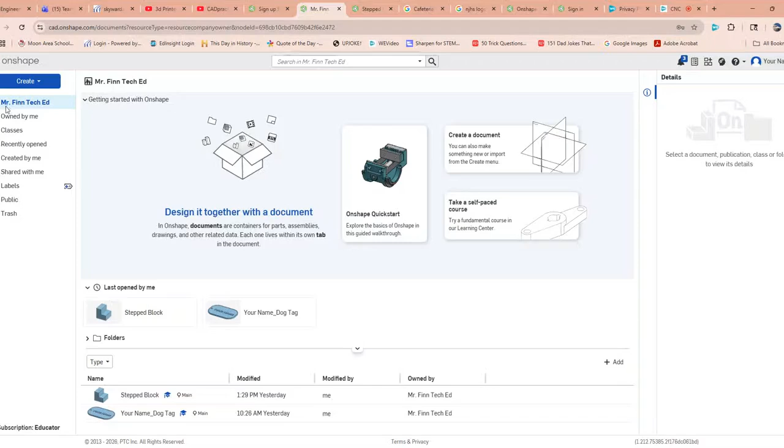Okay, this tutorial is going to show you how to create an insert for your speaker box, which is going to eventually be cut on the CNC machine. So here you're going to log yourself into Onshape, which we've already done and showed you how to do in previous videos. From here, what you're going to do is go to your classes, pick the class that is assigned to you, and you will see that now there is an assignment in here called CNC box insert, and you can go ahead and start that. From there, you can start assignment.

The first step you're going to do is make sure you're in the correct units. This drawing is going to be done in inches. So we want to click our hamburger menu up here on the left hand side. You're going to go to workspace units, and just make sure that you are in inches here for length. Click check. We're good. Now, this is very important because we're going to be cutting this out on the CNC machine: that we select one, the right plane, and two, we operate from the origin.

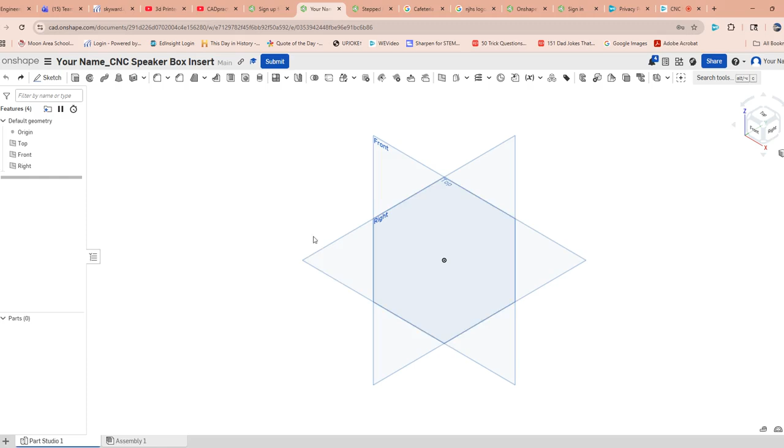And so in this case, the way that we've drawn this, we are going to click our sketch. We're going to select the top plane. Now you can go over here to the cube and select top, or I prefer using Shift 5. Once you start learning these commands on the keyboard, it makes things a little easier. So now we're in top. We're going to select this corner rectangle. Now previously we did a center rectangle. In this case, the way that we need this to be cut out on the CNC machine, we're going to select corner rectangle, and that's in this drop down here. So corner rectangle.

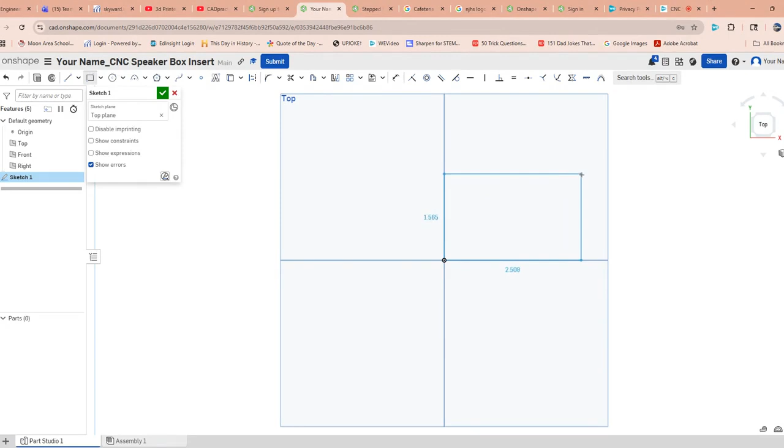We're going to select our origin, and we're going to draw a shape of any size. Corner rectangle, and select this any size for now. And what we'll do is we'll be able to set this to the size of our CNC insert. And our insert here, left to right, is going to be 9.25 inches.

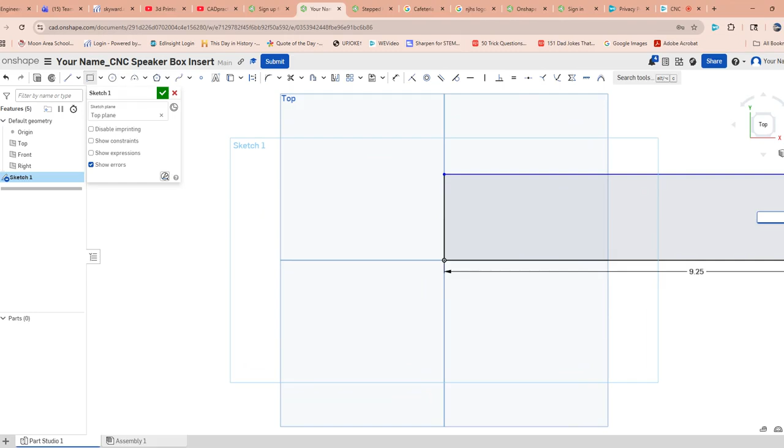Hit enter and that gives us our option to do our height here, which is 4.5. Enter. Now you can zoom out using the wheel on your mouse. You can see we're way outside of what we originally were, but that's okay. We're in good shape here. At this point, you can just select the checkbox. We're going to go back to our isometric view, which you can do either over here on the drop down isometric, or I like to use Shift 7.

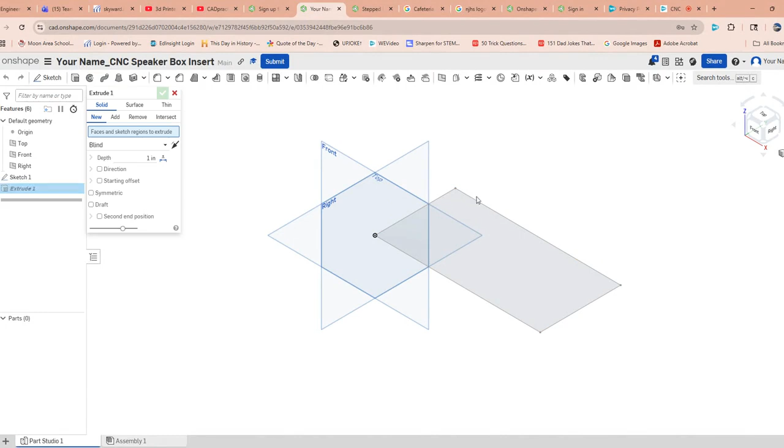That will take us back. Now at this point, we're going to extrude our CNC box here. We're gonna bring this up to the size of our piece of wood that we're going to be using when we get down there in the shop. And you're just gonna simply extrude it. Make sure you're extruding in the right direction. We're gonna come up out of it. It should default that way, but if it's not, you can pull it up. And we're gonna select 0.75, which is the size of the lumber that we are going to plane down. Okay.

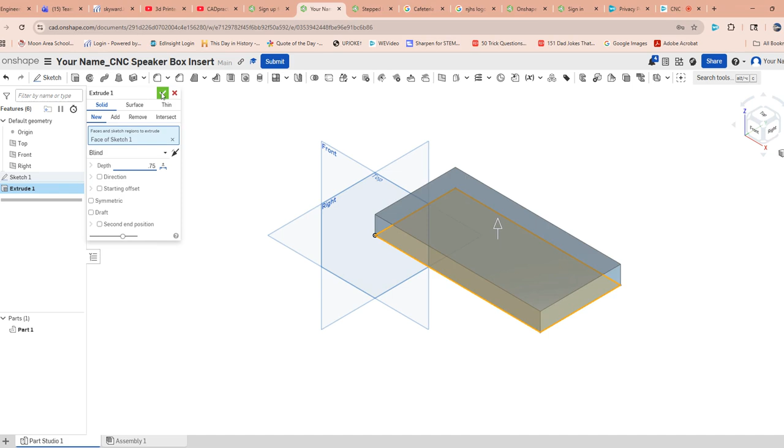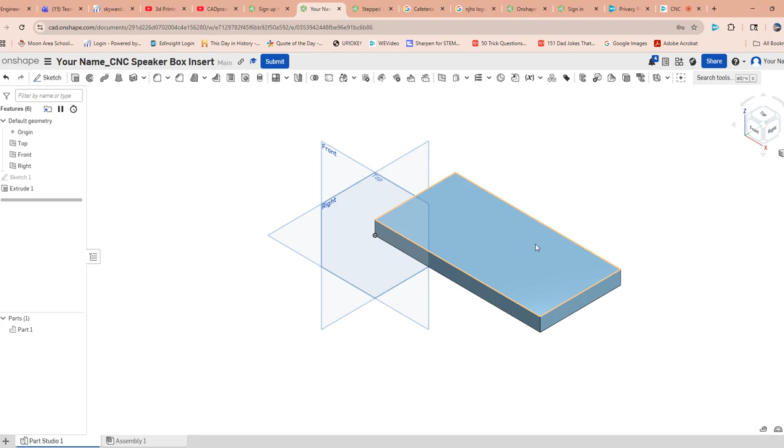So we've got our blank here. We basically have laid out the wood blank that you're going to cut out down in the shop. Now what we've got to do is cut out of the center here so that the sound flows out of your hole here and into where your phone's eventually going to be placed. So in this case, what we're going to do is a sketch. We're going to pick the face that we want to sketch on, and that's going to be the top of the plane here that we just drew. And again, we're going to go back to our top view. You can do Shift 5.

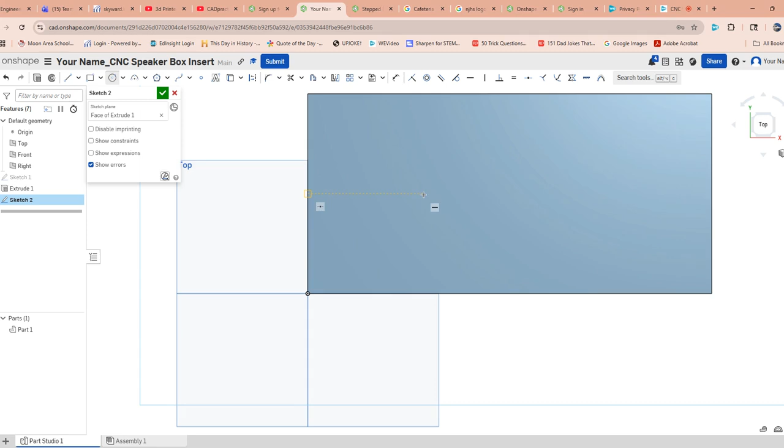Now at this point, we're going to select center circle. There's a little drop down here. You can do center point circle. And you're going to kind of move your way down here until you see the midpoint show up there. And then you can drag over slightly. It doesn't really matter where at this point. Just drag it over somewhere here. Click once, drag out. The dimension that you're going to enter here is 2.5.

Now, this is not where this circle is placed, so we've got to use our dimension tool to bring ourselves back into where we want it to be left to right. So we're going to use our dimension tool here. We're going to click the center of the circle. We're going to click our edge here, drag up. And we want that center of that circle to be 2.75.

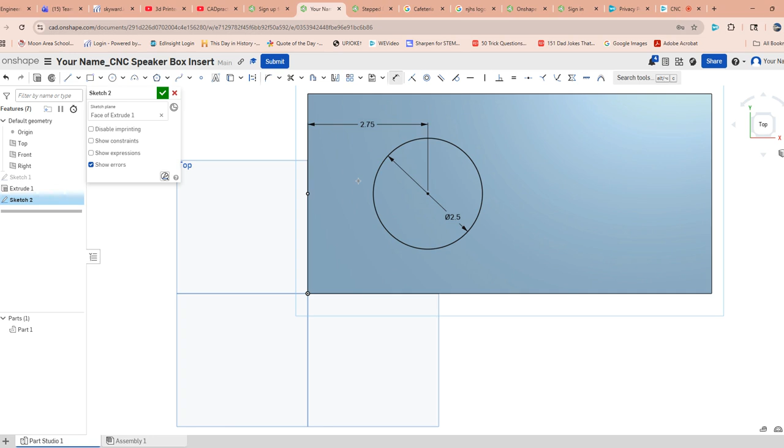So now we've located the circle where we want it to be. Next, what we're going to do is draw a corner rectangle. We're going to link that off of the edge here. Just put it roughly about where it's supposed to be. Link it off the edge. Drag it out any distance. Our left to right on that one's going to be 2.5. Our top to bottom there is also going to be 2.5.

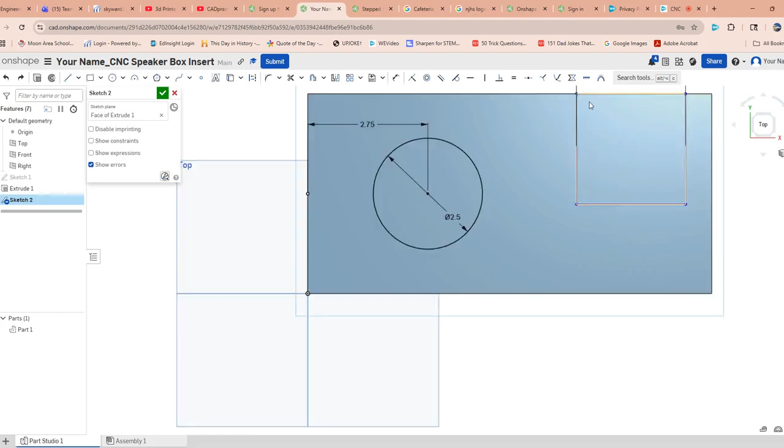So basically what we've done is we've created, made a little mistake there. Might have to use our dimension tool. Dimension, well, I was pretty close, 2.5. So now we've created a box here.

Now we've got to locate this where we are going to want our phone to be dropped down into. And looking at our drawing here, that is 5.25 from the edge here. So we're just going to use our dimension tool here, dimension. Click our edge, dimension, edge, edge, drag. And we want that to be 5.25. So we've now got our hole and we've got our pocket.

So the next thing that we're going to do is create an arc for where our sound's going to come out the bottom of our phone into our passive sound speaker here. So we're going to do that using the arc command. And we're going to drop over here a couple different types of arcs. You're going to select the 3-point arc. And we're going to put it not in the center, but somewhere to the right here, just slightly into our square box. Not super critical at this point. We're going to take this one a little further to the farther side of our circle, not in the center. And then we're going to drag our arc down.

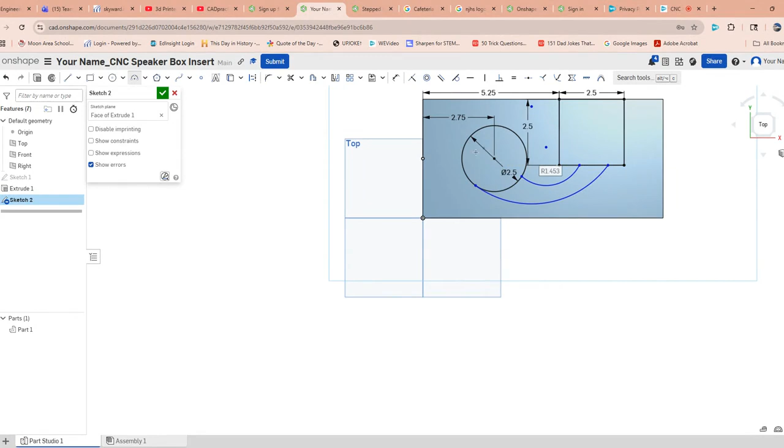From here, we're going to take our arc, another arc. We're going to go slightly to the left of our center point here in our box. And this is where our sound's going to poke out of our phone and go into our passive speaker that we're creating here. And you can click it where it intersects your speaker. Click and drag it so it's relatively parallel to your other line there. And that's not super critical. Basically what we're doing is we're giving a sound to move out of our speaker hole here from where our phone's going to be placed.

So at that point we are good with our arcs, with our circle, and with our square. Now we've got to remove these portions of the circle and the square using what's called our trim command. And our trim command is under the trim, extend, split commands here. We can do trim, looks like a little pair of scissors, or you can use M on the keyboard if you'd like. Click, space in between, click. So we've now created a space for our sound to flow out of our phone and into our speaker hole here.

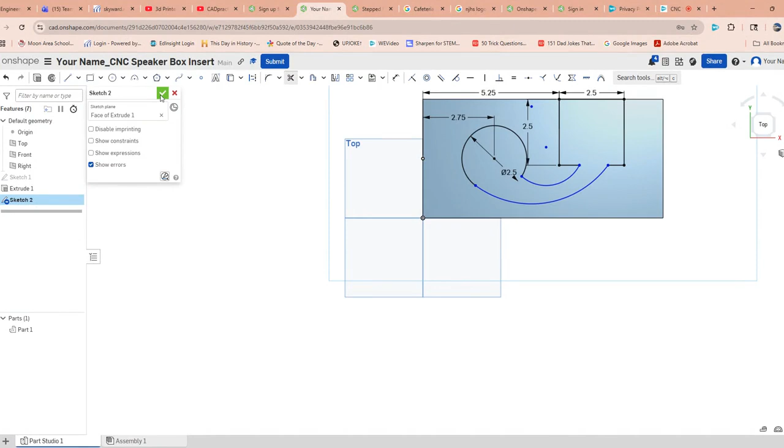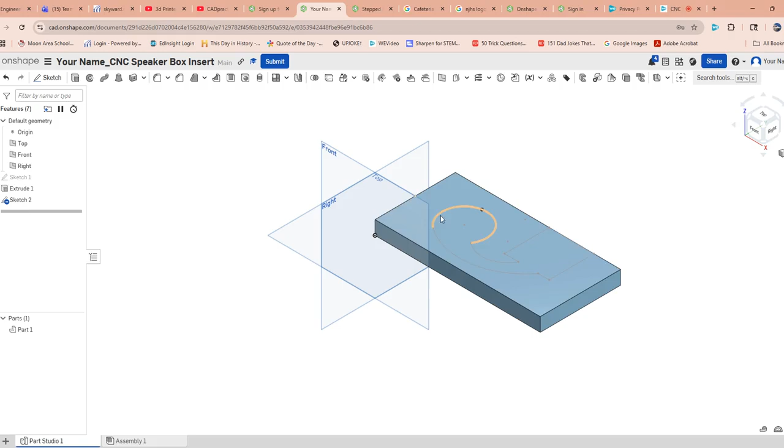At that point, we're going to finish up that sketch. Just click the green box there. And we're going to go back to our isometric view, which is either over here on the cube, or you can just do a simple Shift 7 like I like to do. So now we've got a couple different shapes here. We are going to work kind of opposite of what we've done in the past, in that we are going to take away from our object in the center. So we've got our drawing right on the face of our blank piece of wood, and we're going to extrude this, but we're going to take it away.

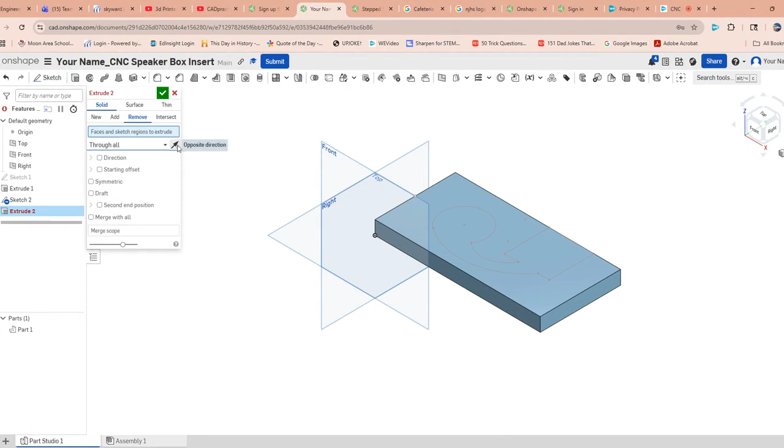So in this case, same idea here. We're going to click our extrude. Now instead of adding, we're going to remove, and it's going to ask us, where it says blind, all these different crazy options here. We're going to go through all, but we've got to change this direction so that it goes through. So if we select our object there, we want to change our direction, it's obviously going the wrong way there. If we click opposite direction, we've now cleared out the hole where our CNC machine is going to make the cut.

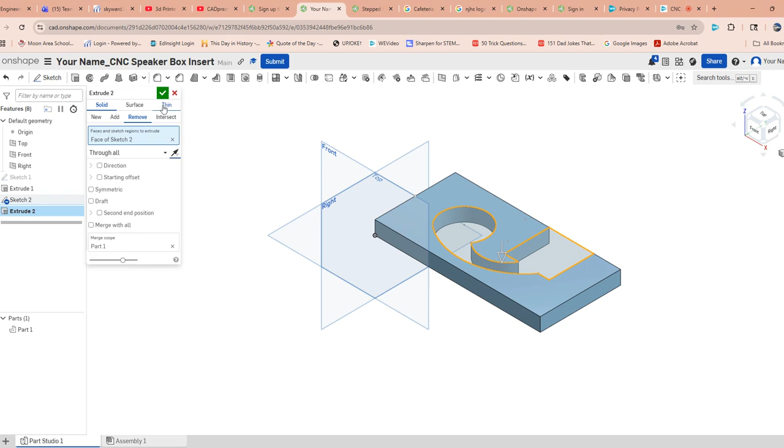Click check. And at this point, we've now completed our speaker box cutout. And you can just simply click your submit. We're not going to save this as a STL file like we did with our previous drawings, just because we're going to have to use this in what's called a DXF file. And Mr. Finn will set that up for you as far as cutout on the CNC machine. But that's it. Go ahead and click submit. Get yourself credit for that drawing.